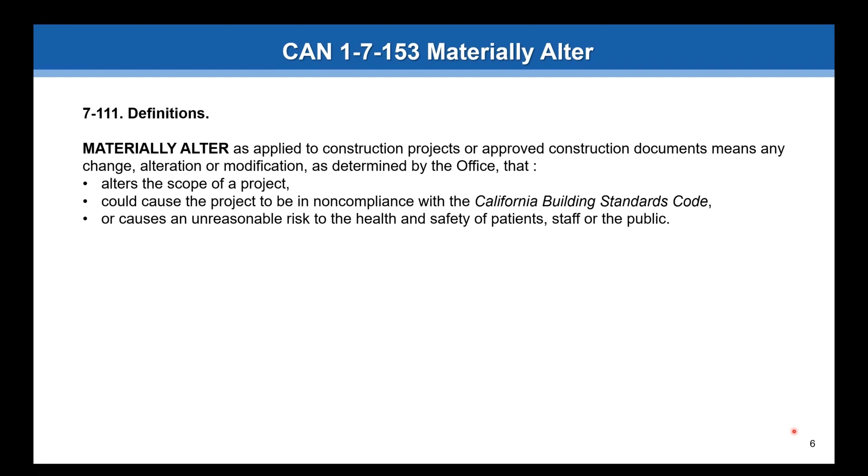The reason we're getting into that is because we're also going to define what's non-material. So if you're meeting these requirements, these are ACDs. So, changes to the approved work.

Section 7-153(a) basically states that any changes to the approved construction documents do require an amended construction document, an ACD, to be approved by the office. This work would include corrections of errors in design and/or construction, bringing construction documents or construction into compliance with the code, or changes to the scope of work and additional work required because of discovered conditions.

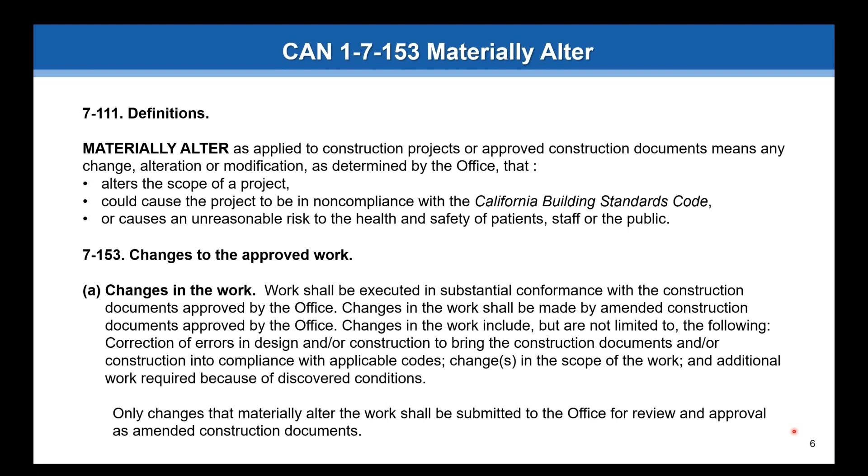Only changes that materially alter the work shall be submitted to the office for review and approval as amended construction documents, or ACDs. Only if it's materially altered do you need to submit it for review and approval.

Continuing on, this is more the bulk of this, what's non-materially altered. The following types of changes in work do not materially alter the work and do not require submission of amended construction documents to the office. That does not mean that we do not need to see them. It just means we're not going to review them. We do need to concur with them.

So there are 8 items that qualify as non-material. I'm going to go through them one at a time. The first one is clarifications and interpretation of the plans and specifications by the design professional responsible in charge of their work.

If calculations by a structural engineer are necessary to determine the structural and non-structural adequacy, an ACD shall be submitted to the office for review.

That being said, structural calcs by themselves do not make a non-material alter change material. Basically, if those calcs are required to justify it, then it is an ACD.

We see a lot of structural engineers add calcs to basically back up the design, even though they may not be necessary, and in that case an NMA can still be submitted. So structural calcs within themselves do not negate an NMA, but just be very cautious about using them, because a lot of people will look at them, see there's structural calcs involved, and say this disqualifies it.

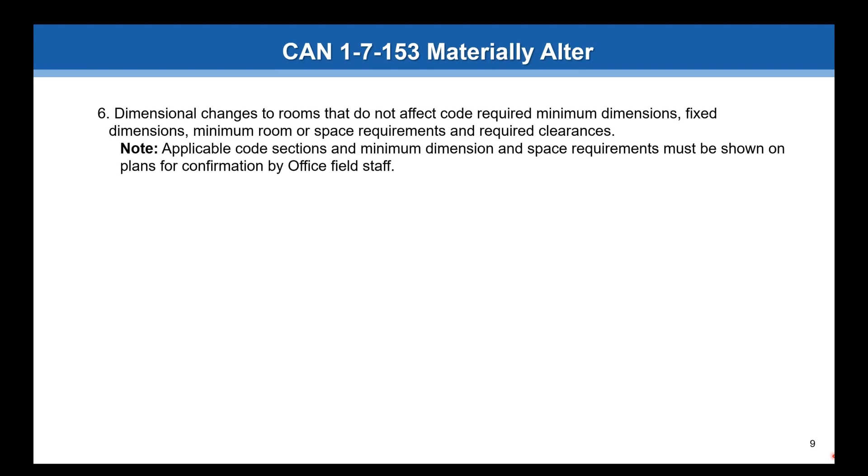Relocation of doors, windows, electrical switches—this is the same thing as above—that do not require additional changes to the work to make the relocation compliant. As I said, if you're still meeting the code requirements, these things are fine to be shifted. If you're adding anything new, that would be an ACD, because you're adding load in most cases.

And number 8 is the last one: relocation or reconfiguration of cabinetry that does not affect code required minimum changes. Basically, cabinets can be replaced in kind or very similarly as an NMA and do not require an ACD—unless such cabinetry reconfigurations increase load to the structural supports, framing, or the ceiling from which they hang.

Okay, and basically the rule of thumb for these is you can't put anything in that's going to make it non-code compliant.

So continuing on, those were the 8 items that qualify as non-material alterations.

If the architect or engineer in responsible charge of the project determines that the changes to the approved construction documents are necessary and do not materially alter the work, they still need to stamp and sign the drawings, as they would with any other change, as they do with regular projects.

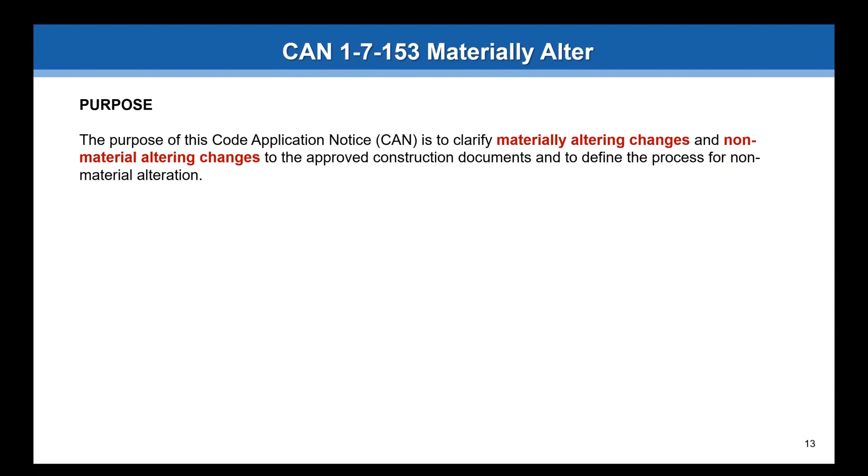Okay, getting back to the text of the CAN. The purpose of this CAN is to clarify what is materially altering changes and non-material. The background is that the administrative code and the building code basically state that any change to a project, to the drawing, approved drawings, must be an ACD.

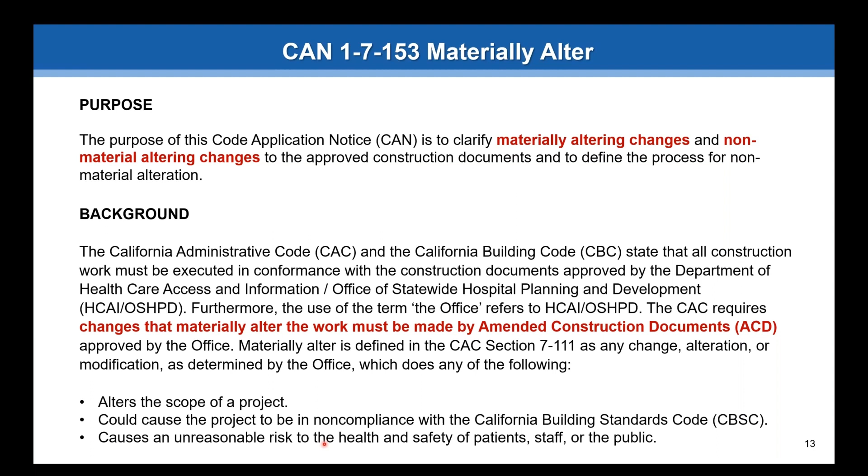As I already went through, these are ACDs: items that alter the scope of the project, could cause a project to be in non-compliance with the code, or cause unreasonable risk to the health and safety of patients, staff, or public. We do recognize that there are changes that would not require an ACD. So that's why we have created the NMA, or the non-material altered category.

All changes need to be submitted to the office, either an NMA or an ACD, prior to the installation of work. Actually, an NMA can be done after the installation of work, so we need to change the wording on that. But we do need to see them. If you do an NMA, that does not mean we don't need to see them. We do need to see them. We do need to concur with them.

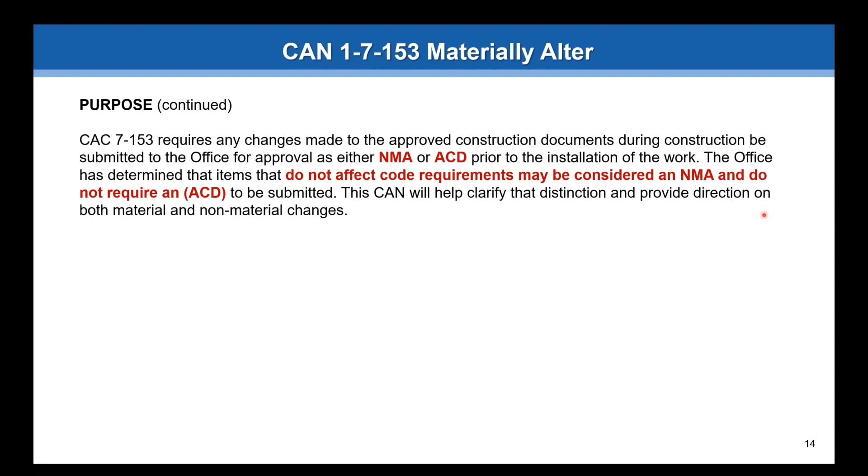So again, we recognize that not all changes are material, so we wrote this CAN to provide that clarification. Our interpretation is that a non-material altered change is one that does not materially alter the work, while an ACD is changes to construction documents that do materially alter the work. Therefore, the office will only review the changes that do materially alter the work.

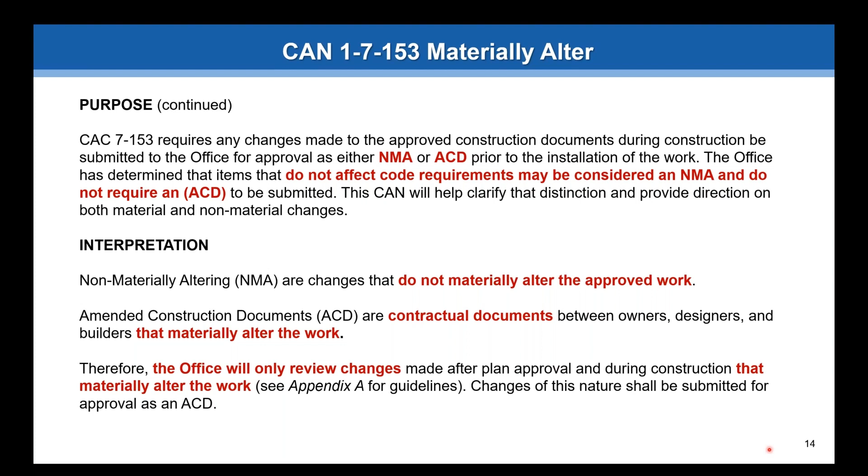And the keyword there is review. We do not review changes for NMAs, we just look at them and concur that they are NMAs. That's why, again, it's supposed to be super fast.

Stamping and signing by the architect or engineer - again, this follows the same process for any ACD or approved drawing. It's under 7-115 of the administrative code, and it requires that the engineer of record...

Let me just read through this because we'll get into more detail here. When the design professional of record determines the proposed change does not materially alter the work, the NMA is required to be issued. Stamping and signing the NMA documents by the architect or engineer represents that they are accepting responsibility that the NMA will not cause the project to be in non-compliance. That is why we require the stamp and signature.

The change log and the change form are just tools to track the changes and or get the concurrence. The change form is for that concurrence. They will be issued along with any NMA.

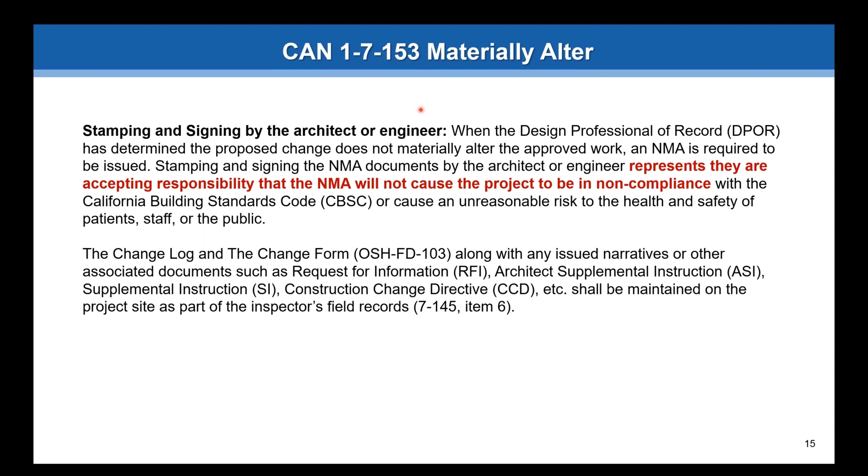So the change log and change form, along with any issued narratives or other associated documents such as RFIs, ASIs, supplemental instructions, CCDs, shall be maintained on the project site as part of the inspector's field records. That is in the administrative code.

All changes in the work are subject to concurrence of HCAI field staff as to whether it materially alters the work or not. The architect or engineer responsible in charge shall maintain the log in which all changes of the work are clearly recorded and identified as either materially altered or not.

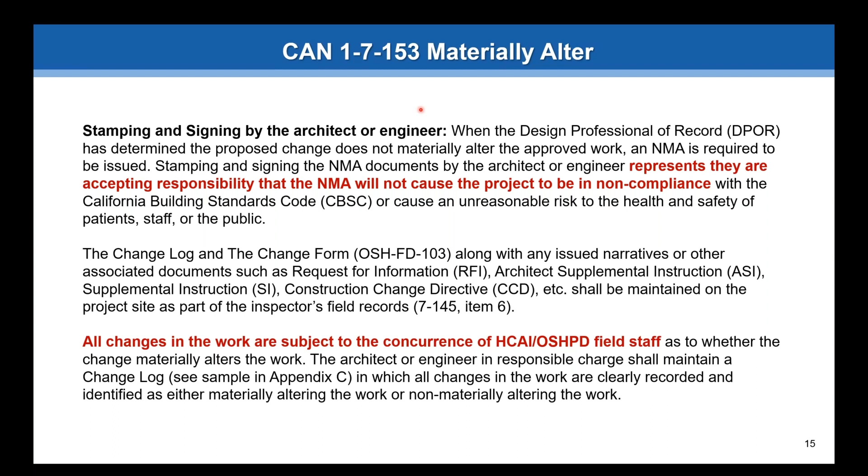This concurrence shall be determined by a review of the required change form. This is Appendix B, the form we just looked at, and it will be submitted with each NMA request - one NMA per change form. The change form should have the details such as references, narratives, drawings, or sketches that offer enough definition that the field staff can make their concurrence.

We're going to talk about the time limitations here in a second.

The change log shall be maintained by the design professional of record and accompany the change form. A copy of it may be requested when you're submitting the NMA so they can track if there's anything else coming. The idea is that they may look at the log and say, yeah, I concur. We do have some people asking our field staff to sign the log instead of the form. You do need the form signed for your concurrence.

A rejection or non-concurrence of an NMA requires that proposed revision to be submitted to the office to review as an ACD. So if it's not an NMA, you're going to be asked to submit it as an ACD. And you're putting yourself at risk there because some of the work may have proceeded. So we don't want design professionals to be coerced into making ACDs into NMAs. You need to be very careful about that because you may have to uncover any work done that is not qualified as an NMA.

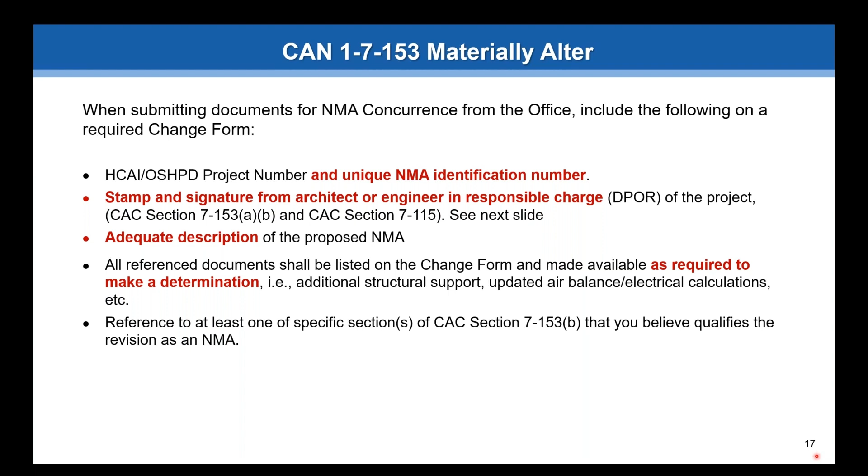Must have reference to at least one specific section of the 8 items that we looked at earlier. The change form shall have no more than one change - so that's what Caesar was asking about a few minutes ago - and shall identify what section it meets, again one of those 8 items.

Moving a cabinet may include a power outlet, light fixture, etc. That is considered one change and does not need multiple NMAs to move the cabinet - one for the outlet, one for the light fixture, etc. You just need one NMA to show that you're changing the cabinet, and because of that, these light fixtures or electrical outlets may be shifting. Just show that on one drawing, and if that's sufficient, it will be concurred with.

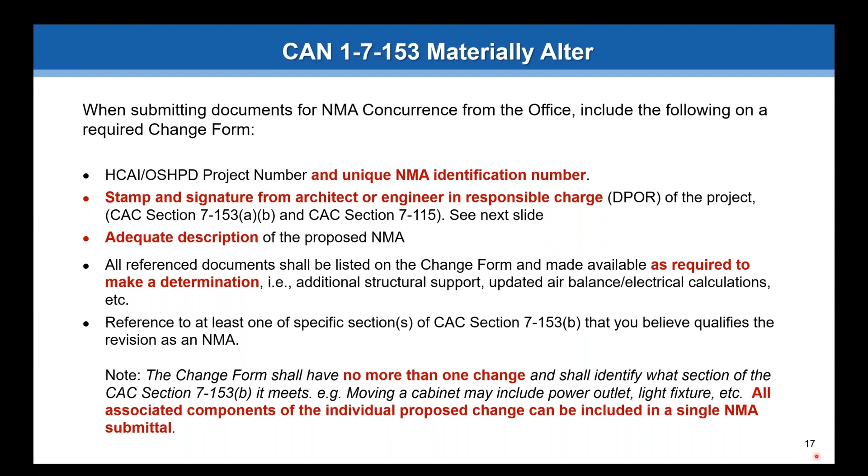Stamping and signing - this is an area that causes a lot of confusion. Section 7-115 clearly states what needs to be stamped and signed and how to do it. The signature from the architect or engineer in responsible charge of the project - only the signature - and a stamp and signature of the architect or engineer preparing the changes is required on the drawings. On the form itself, the stamp and signature from the architect or engineer responsible in charge of the project is required; they are the one making the determination if it's a non-material altered change or not, and any form is an instrument of service.

Here's some basic rules that we're following for the processing of NMAs. Concurrence will generally be no more than a 5-minute observation for each NMA.

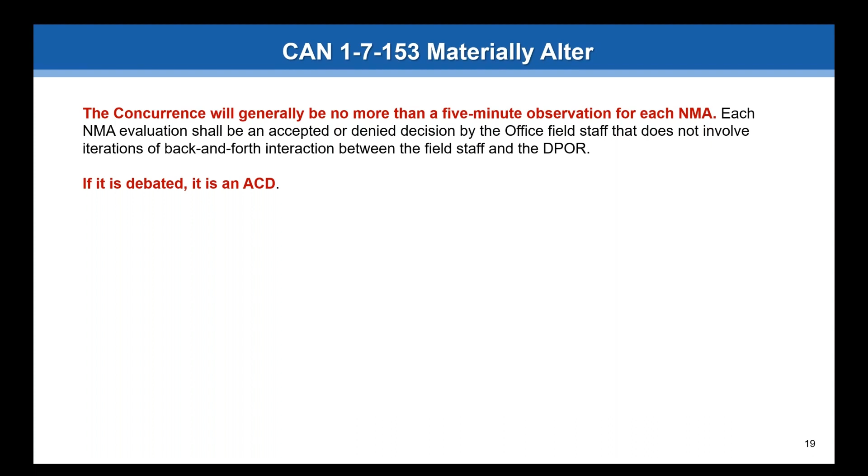Each NMA evaluation shall be accepted or denied based on the field staff's decision, and does not involve iterations or back and forth interaction between the field staff and the design professional. Make it very clear what the change is and that it's an NMA, and move on. It's not to be debated. If it is debated, it is an ACD. That means it wasn't that clear.

Again, referencing one of the 8 items, I won't go through all of these, but it's all a check or a mark, an X, whatever you want to do to show this is why we're saying it's an NMA.

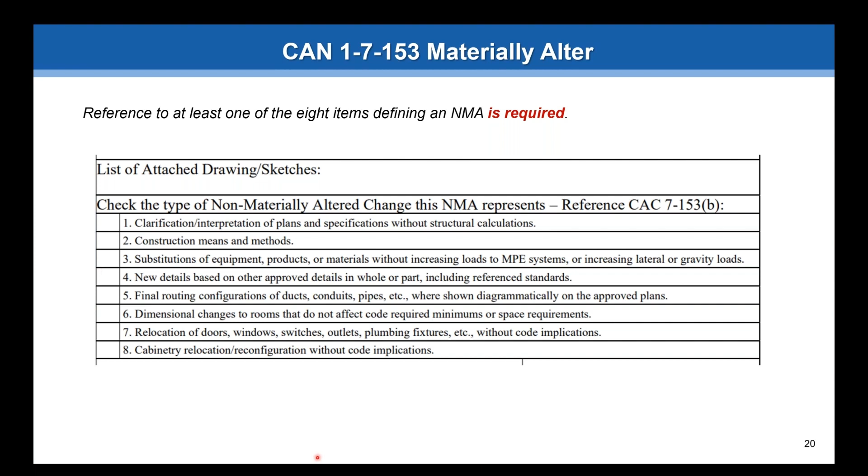An NMA may be submitted in many formats. You can submit an RFI, ASI, SI, etc. as an NMA, but it needs a distinct NMA number and tracked as an NMA. HCAI does not review RFIs or ASIs, but we do need to concur if it's becoming an NMA. We don't need to see every RFI, we don't review them. There may be a lot of RFIs, like what color is this wall, is it changing from red to yellow or whatever. We don't need to see that, we don't care.

Note, any work performed based on a non-materially altered position that is found to be material will be subject to review and possible destructive investigation. We don't want, just for the sake of keeping the project moving, to do it as an NMA when you know an ACD is actually required. You may have to go back and open up what was done to show that it's actually now an ACD.

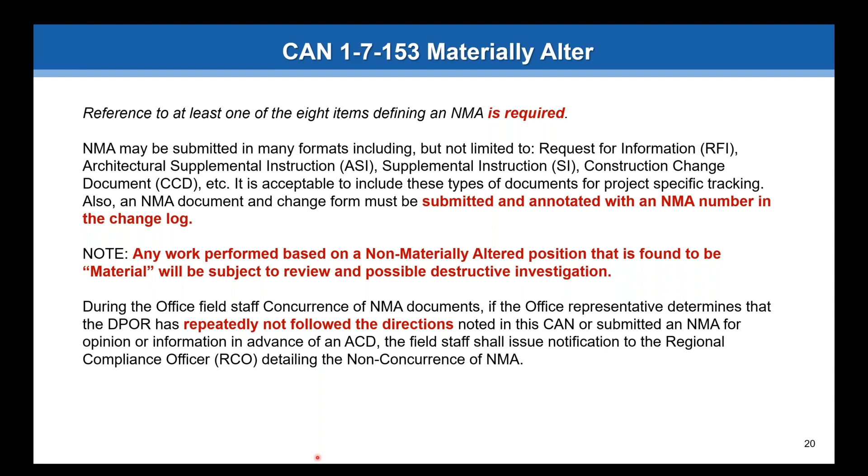During the office and field staff concurrence of NMA documents, if the office representative determines that the DPOR has repeatedly not followed the directions in this CAN, it can be reported to the RCO, and the allowance to proceed with work prior to concurrence may be revoked. There is nothing in the code that allows the work to continue without previously being approved. So that's basically an allowance we're providing for NMAs, a privilege if you will. And if it is repeatedly being violated, it can be revoked.

We do not want to see any RFIs or ASIs, we don't review them, we don't want to see them. An RFI or an ASI may become an NMA, they may be converted to an NMA if there is a design change that needs to be concurred with. We do want to see those, so make sure we do see any NMA if it is already converted. Again, we don't review the RFIs and ASIs, but they can be converted to an NMA, and we can concur with those.

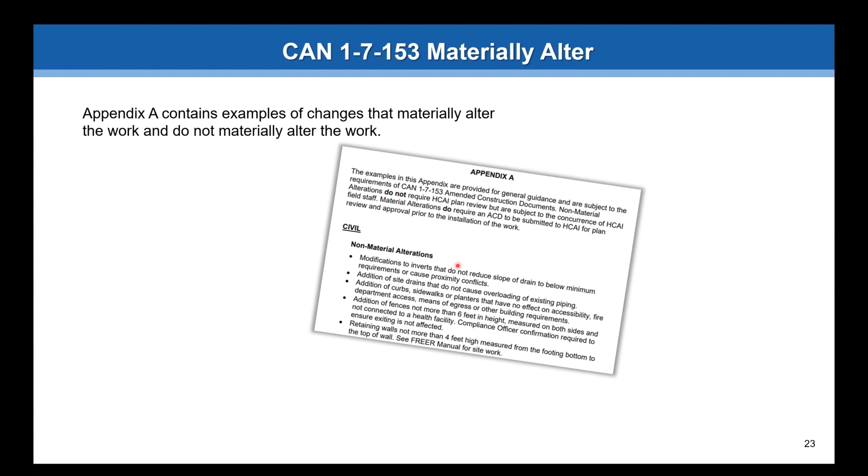Appendix A, as I said, includes changes that materially alter the work and those that do not. There will be examples of both non-material and material changes. Appendix B is the change form, and it can be downloaded separately. Please only submit this one form with your NMA.

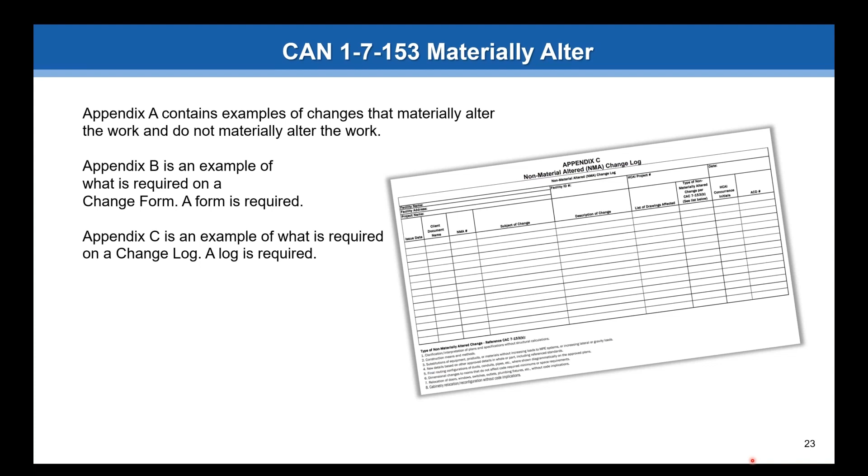Appendix C is an example of the change log. The change log is required by the administrative code, so just have it on site or available if staff need to see it. You cloud the change, identify the NMA number with a delta, and you're done. That's all that's needed, you don't need to have the whole sheet reapproved. Now, if that delta is an NMA, it's treated just like an RFI, carried forward for the project. There's no need to have an NMA converted into an ACD.

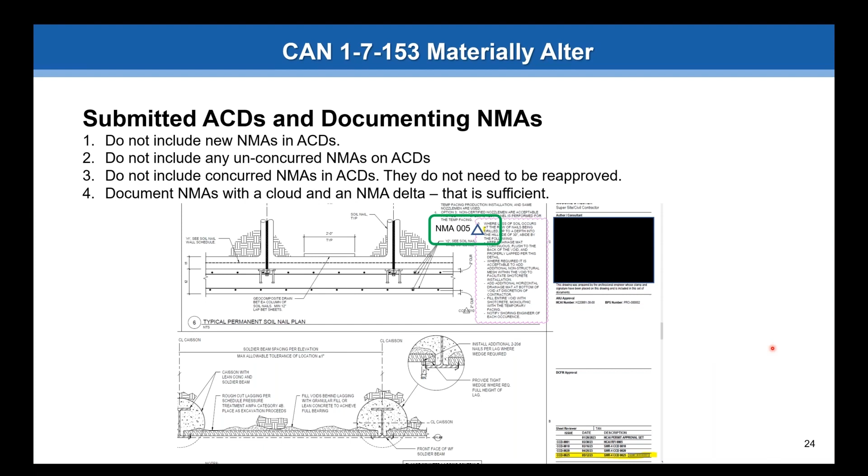We're almost on the last couple slides here.

Tips for NMAs: determine first if an NMA is actually an NMA and not an ACD. If it's an NMA, proceed to item 2. If it's an ACD, submit it as such. Prepare the log and the forms.

The log and the NMA form are required for the NMA review. With the log, provide a description, and with the form, provide a description so a decision can be made based on it. Avoid the use of the word miscellaneous. Don't say miscellaneous electrical revisions or miscellaneous structural revisions. Be specific. If we read the description and agree with it as an NMA, that may be all we need to do. We can sign it off and move on.

An NMA number must be assigned regardless of what the design team calls it. You can call it whatever you want, but we still need an NMA number on it. The NMA number should be sequential, 1, 2, 3, 4, 5. Just because you have RFI 54 doesn't make it NMA 54. The NMA number needs to be sequential.

Use proper industry terminology. We have one contractor out there that calls all changes RFIs, including our NMAs. We don't review RFIs, so your NMAs are not going to get reviewed if you call them RFIs. We need a distinct NMA number on these.

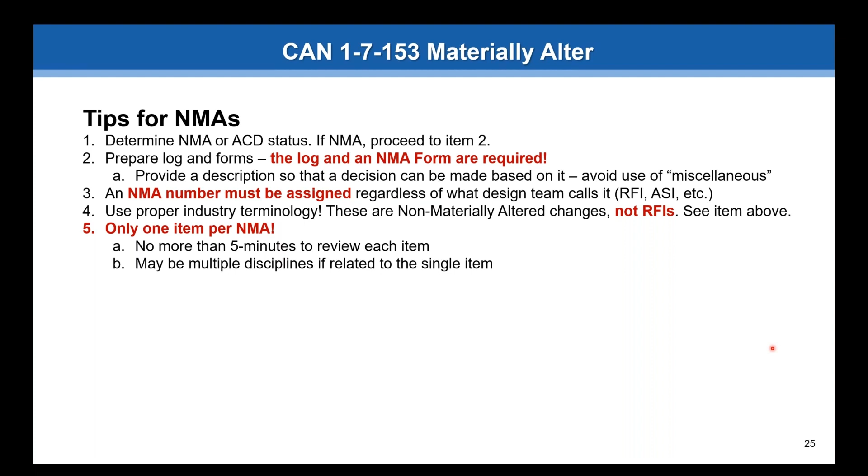Must be a binary decision, yes or no. Is it an NMA? No, then it's an ACD. The preferable answer would be, is it an NMA? Yes, it's either yes or no. There's no in between. Once there's an in between, and you're debating it, it becomes an ACD.

NMAs will be looked at when staff are on site or when other arrangements are made in advance. With coordination with the field staff, you can email them. There are different ways to get it to them for review, so that's coordination with them, however they want to work. But as a general rule, they're looked at when you get to the site. If you make special appointments or whatever to have them reviewed, that's fine. It's up to the individual field staff member.

You can present it to our field staff, you can email them, or you can have the NMA change log available when you're meeting with them. Do not convert NMAs into ACDs after concurrence. We went over that earlier. Again, we see this quite a bit. It's not needed and it's a waste of time, and you may get that ACD kicked out as not required.

If there is a question as to whether something is an NMA, it's okay to find out and ask the question beforehand. Actually, I want to jump back to number 8. If it's not converted, do not convert NMAs to ACDs after concurrence. It won't get kicked out. The ACD will be returned and held up until that's corrected. It won't be returned as not required, because the ACD portion of that may still be required.

The question we have here, it's near the beginning. It reads: can you provide examples of something that does not require either an NMA or ACD, something that can remain RFI or DPOR direction only?

Well, the simple answer is colors. You're changing a color or a certain type of material, who cares? That's the simple one. There's also going to be some clarifications. Even item 1 says clarification and interpretation of plans and specifications.

If there's a missing dimension on a floor plan for a wall, it's 5 feet, it just wasn't shown. The contractor writes, what's this dimension? 5 feet, that's an RFI. We don't need to see that. You're not changing what's in the building, you're not changing anything physical, you're just providing clarifying information to the contractor. That's probably one of the better examples.

Perfect. Is that— Yeah, that answers the question. Next is a question regarding electrical scope. The original HCAI approved construction document has two 20-amp power outlets.

We only need 1. Can we use the NMA to reduce the scope of work to remove 1 power outlet, or is this an ACD? In most cases that's going to be an NMA, but again it depends on the scope and the extent of that. That would be a conversation with your compliance officer. But typically, if you're reducing or just changing the scope and the load stays the same, it's typically an NMA.

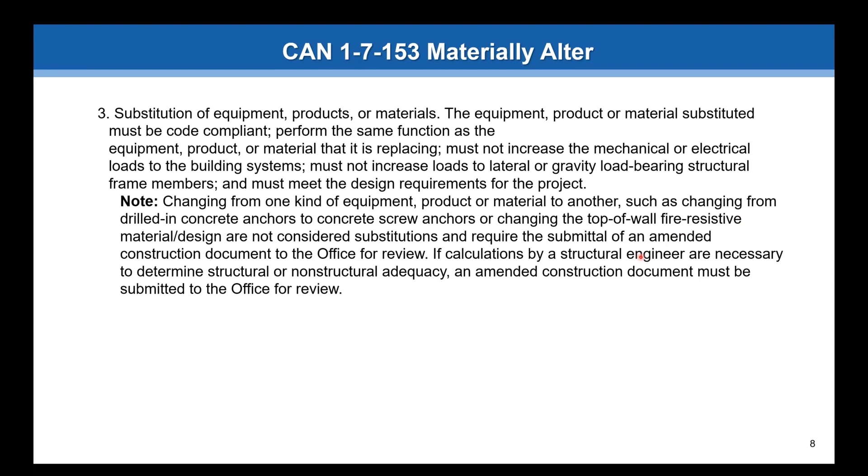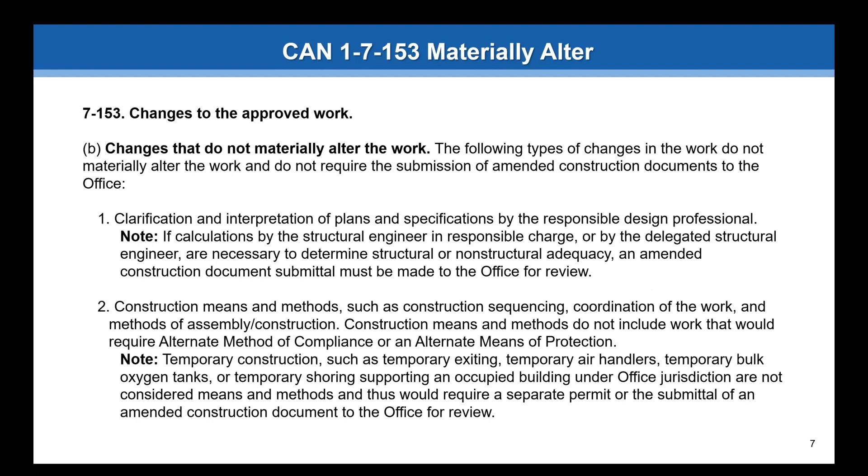Question regarding the form: is the change form from the CAN required, or can a form of our own creation with all of this information be used? The form is an example. These are just examples, so yes, you can—I believe I said that earlier on. This can be done by firm, by project, etc. This is just an example that can be used. It does need to include the information that we're requesting here.

A little more clarification is being asked about the DPOR stamp. The question reads: for the NMA form, for the DPOR stamp, should that be provided by the primary DPOR or per discipline? By the primary. They're ultimately making the decision that this is an NMA. They're ultimately in charge of the project.

Now the drawings, if there are drawings attached, those would be by the engineer or architect making the change. Those would require only the stamp and signature by the person making the change, and the signature only of the DPOR. But the DPOR is making the decision if this is a non-material altered change versus an ACD. So they're the one making that call. Now they may be basing it on what their consultant's telling them, that's fine, but they're the ones in charge of the project and making the decision. So that's why the DPOR stamp and signature would be here.

Richard, I just remembered a question I was asked out in the field about NMAs and the amount of NMAs per project. Is there a limit as to the amount of NMAs on one specific project to where it would turn into an ACD—for example, 10, 15 NMAs—or is one NMA at a time okay?

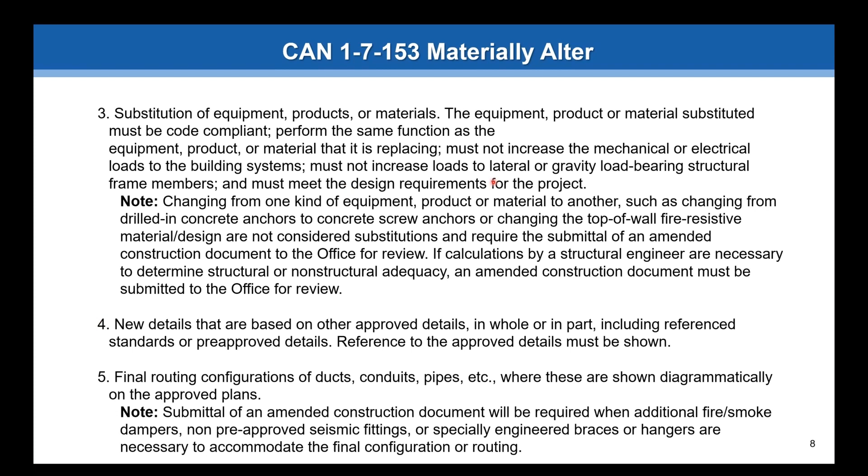All right, thank you for that, Richard. It looks like we're still getting questions about who signs the change form. The question reads: architect or engineer and responsible charge delegate are both required to sign the change form. No.

Let me jump to the form here. DPOR stamp — that's all that's asked for, that's all that's on here. I'm talking about the form. This is your answer: the DPOR is the only one that has a space to stamp and sign from the design side. The drawings are completed just like any other ACD. Whoever made the change stamps and signs it, the DPOR signs it only. There's nothing new there. Okay, so just look at the form — there's only a spot for the DPOR. That'll help make it simple.

Next question, Richard: so an NMA does not necessarily need to be derived from an RFI — it can also be an ASI too? It can be, we don't care what it initiated as. We just want to see an NMA. I don't care if it came from the contractor, from the architect, from the owner — just submit the NMA. We don't care where it came from, what it started with. RFIs and ASIs are just a contractual method to communicate between the design professional and the contractor. It has nothing to do with us. If those questions being asked result in a change to the drawings, that's when you get us involved, and at that point you have to decide, is it an NMA or is it an ACD?

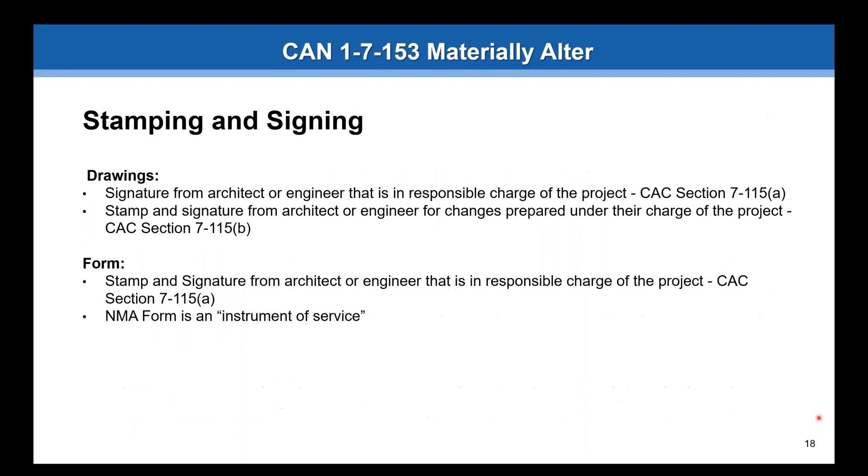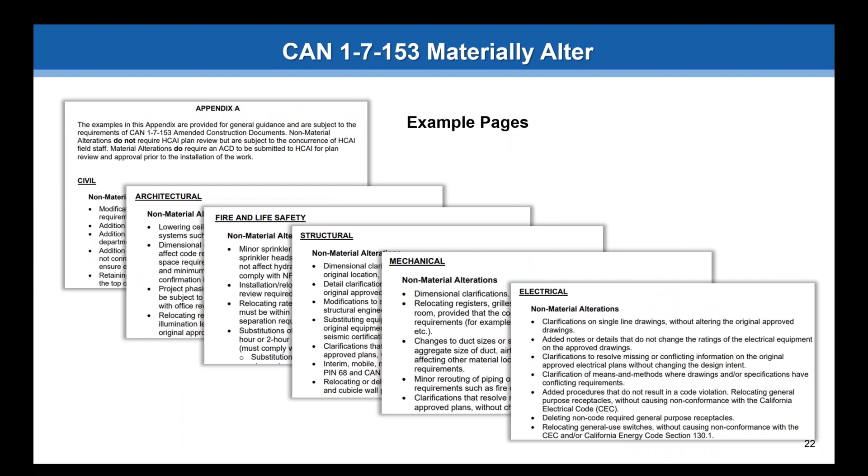So how does an NMA affect a TIO milestone? I don't know if Richard or Monica, you'd like to answer that. I can answer if you want. So TIO is a living document, and ideally, if it's possible, do not submit the TIO with the NMA. Usually what happens is if there's a change or an NMA that gets concurred, then there is the TIO update, which includes an additional milestone that is part of the TIO review. But please try not to include the TIO into the NMA if it's possible.

So Richard, thank you, Monica, for that. Richard, this last question, or maybe second to last question we'll ask is, can it be assumed that all structural issues do not qualify for an NMA unless there is a list considered acceptable to meet NMA? No. Again, look at the CAN. There is a section on structural, what would qualify as NMAs. In that list there's a bunch of examples - not a lot of examples of structural NMAs, but there are a few. And there's also some that are considered material, just to provide some clarification. So don't assume just because it's structural that it cannot be an NMA.